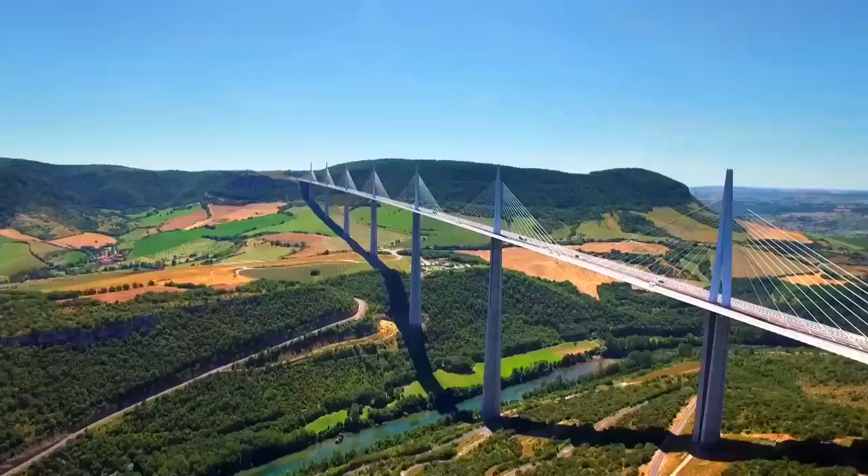Majestic, dramatic, awe-inspiring. These are the bridges that are worldwide icons, as well as engineering marvels. Each of them broke new ground — the first, the biggest, the longest, and the tallest.

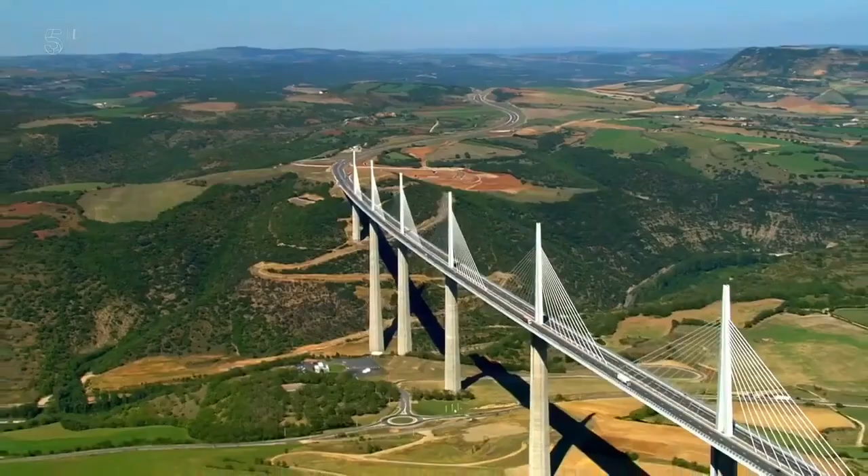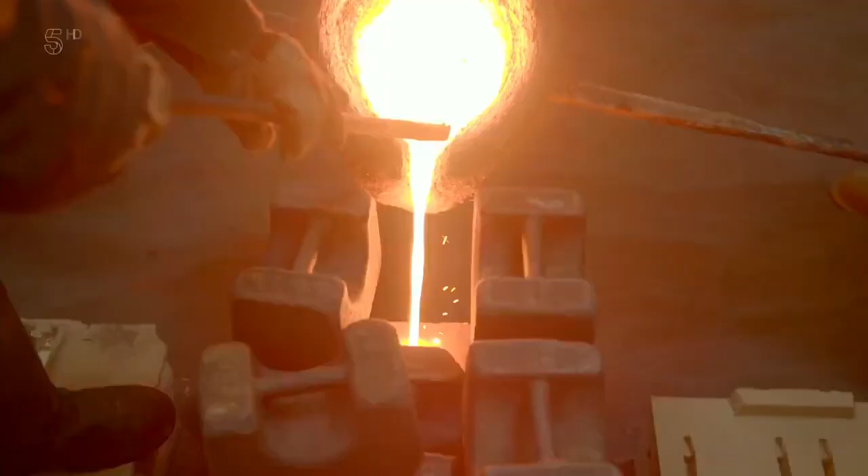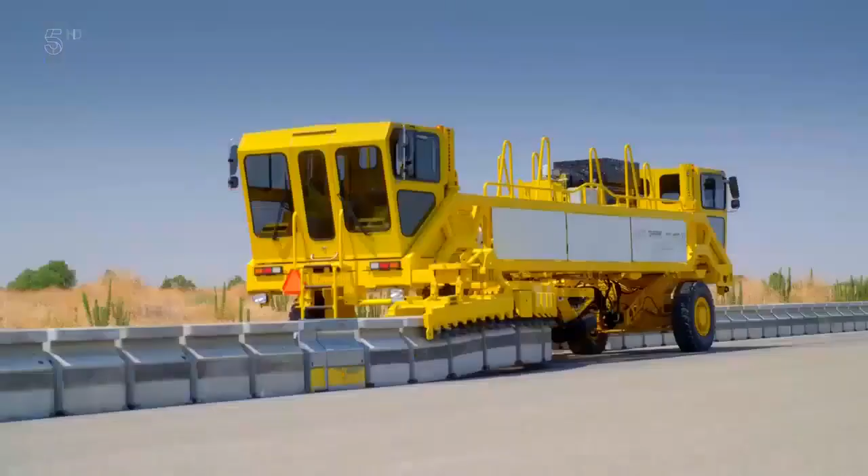I'm Rob Bell, an engineer, and I'm on a global adventure to discover how and why these magnificent structures were built, and to learn about the sweat and the sacrifice that went into their construction. I'm going to take you closer than ever before, inspect them from every conceivable angle, and meet the men and women who keep them working round the clock, no matter what. These are the world's greatest bridges.

New York. 8.5 million people work day and night to make this place richer, brasher, and according to some, greater than any city on Earth.

New York has so many world-famous landmarks, but the one I'm here to see for my money has done more than all the others to transform the fortunes of this city. And it's not the Empire State Building. It's not the Statue of Liberty. It's down there. It's the Brooklyn Bridge.

Rising 276 feet above the water, it stretches 5,989 feet from end to end. 4 massive cables hold up a suspended central span of 1,595 feet and 6 inches. When the bridge opened in 1883, it was the longest suspension bridge in the world. In fact, there's a strong argument that it's the Brooklyn Bridge that made New York, New York.

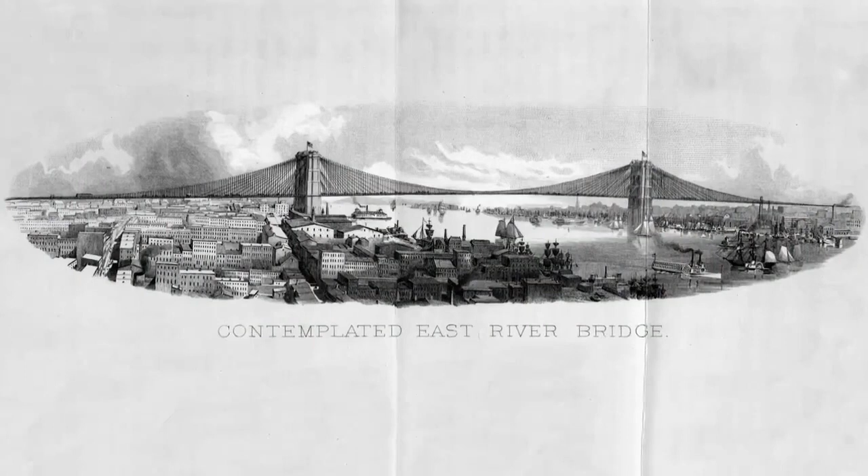In 1857, a new solution was proposed — a suspension bridge, connecting the 2 cities of Brooklyn and New York. The idea was radical, but not exactly new.

The idea of suspending a bridge using ropes or wires over some kind of chasm is an ancient one. And the first ones would have probably looked something very similar to this — a simple catwalk stretched out between the 2 sides of a big drop. It's all very simple, really, and the design principles are clear to see. Now, the part of the bridge that I'm standing on here is called the deck.

The deck hangs from these smaller ropes here called the suspenders. Each of these takes a small fraction of the weight of the deck and the weight of me standing on the deck, up and into these larger cables here, which run the full length of the bridge — these are called the main cables. And at each end of the bridge, the main cables are attached or anchored to solid ground, or in this case, a solid tree.

The beauty of this design is that it doesn't really matter how big the gap is from one side to the other. If you want to make the bridge longer, you just add more cable, which means it's perfect for crossing a large stretch of water. In theory, there's no limit to its length.

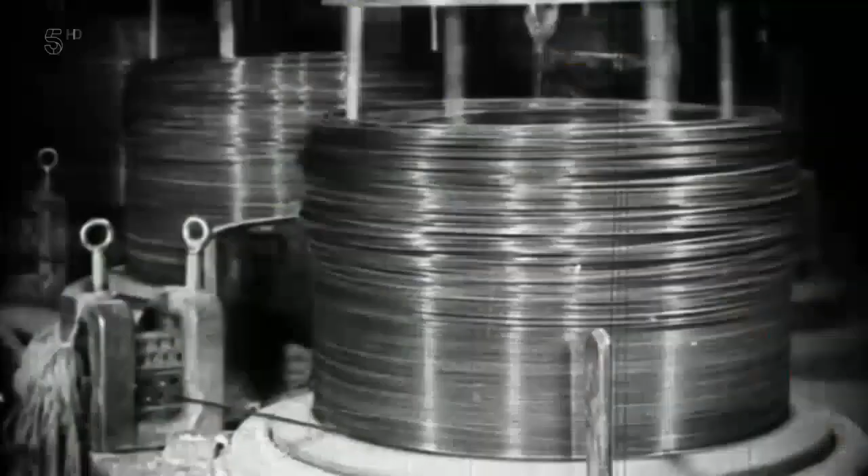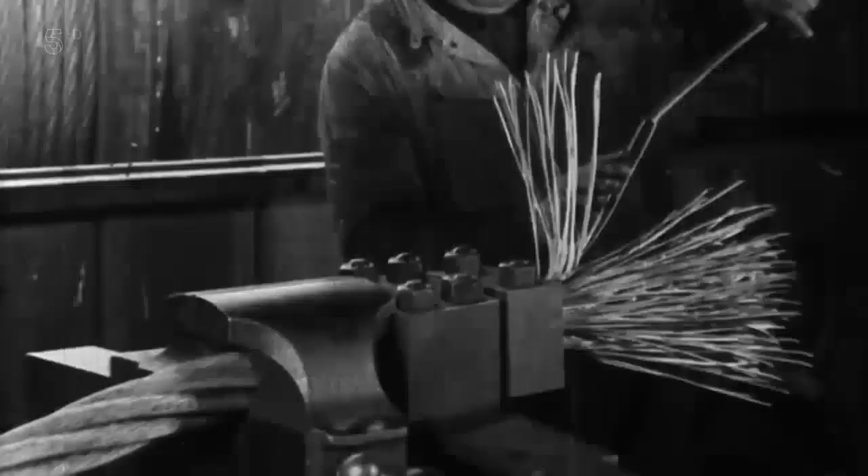In the early 1840s, Roebling read about a new wire rope from Germany and decided to start making his own. Stronger, lighter and longer lasting than its natural equivalents, Roebling's rope was a massive hit. Pretty much any industry that needed to pull or hang things was soon doing it with wire rope. The most innovative user of wire rope was Roebling himself. He took this rather mundane product and used it for something quite extraordinary.

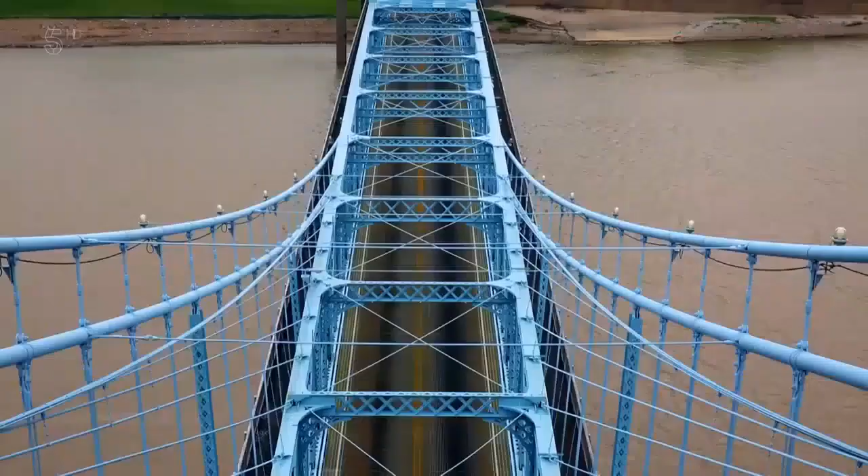This is the John A. Roebling Suspension Bridge, opened in 1866. The main span stretches 1,057 feet across the Ohio River between the cities of Cincinnati and Covington. At the time, it was hailed as a truly groundbreaking structure.

But Roebling was just getting started. He was convinced that he could use his rope to build bridges at a scale the world had never seen. And he knew just the stretch of water to prove it: the East River between Brooklyn and Manhattan. But he also knew he needed political approval. And that meant dealing with this man, the boss, possibly the most corrupt politician in American history.

The Brooklyn Bridge, a structure that changed engineering forever. When it opened in 1883, it wasn't just the longest suspension bridge on Earth, but the most revolutionary. It shattered accepted notions about how long bridges could stretch, what they should look like, and even how they're built.

Brooklynites supported the idea from the off. They were fed up of the old ferries and wanted the bridge as soon as possible. In 1867, leaders here at Brooklyn City Hall agreed to buy $3 million worth of stock in the newly formed New York Bridge Company.

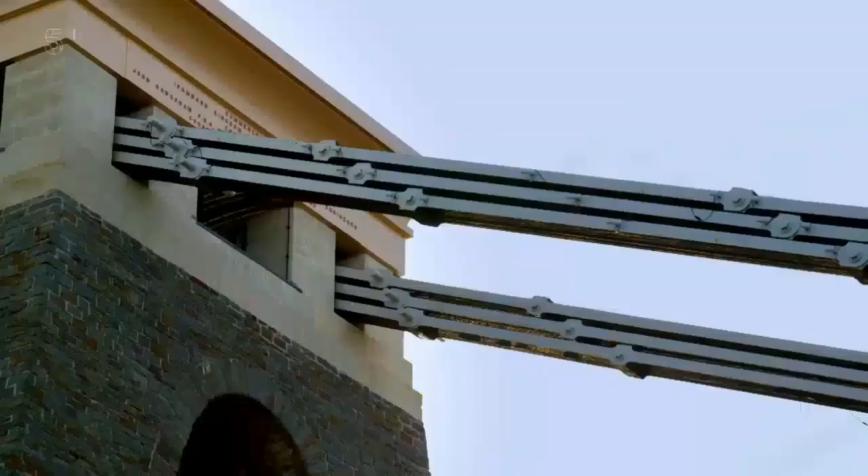Roebling's Cincinnati Bridge had proved that his wire cable was the perfect material for making long suspension bridges. Prior to that, suspension bridges used chains made from metal links.

Now, a chain bridge has one potentially fatal flaw. To paraphrase a well-known term, a chain bridge is only as strong as its weakest link. Let me show you. If I take my bike chain tool here and I remove one pin, it only takes one link on a chain suspension bridge to fail, and the whole thing comes crashing down.

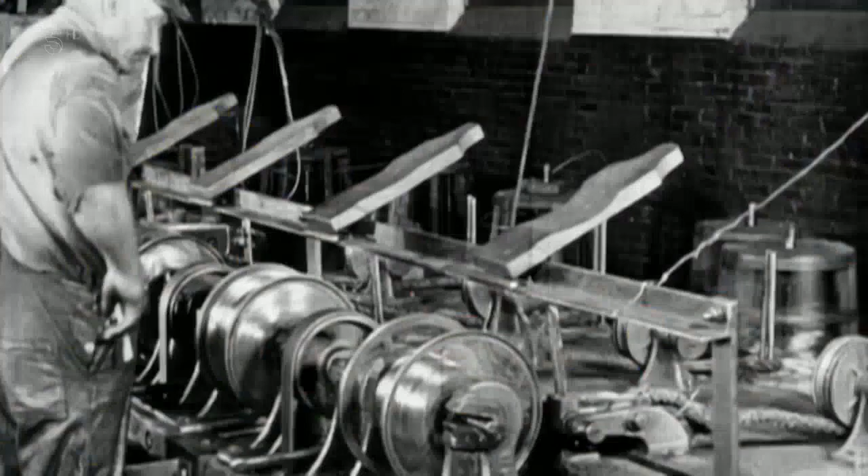But that's not the case with wire rope or cable. This is made by twisting multiple steel threads together to form thin strands. These can then be twisted to form thicker ones. The whole process can be repeated until these cables reach the desired width and strength. Not only can they carry massive loads, but if one, two, or even several threads fail, there are still hundreds of other strands keeping the wire in one piece.

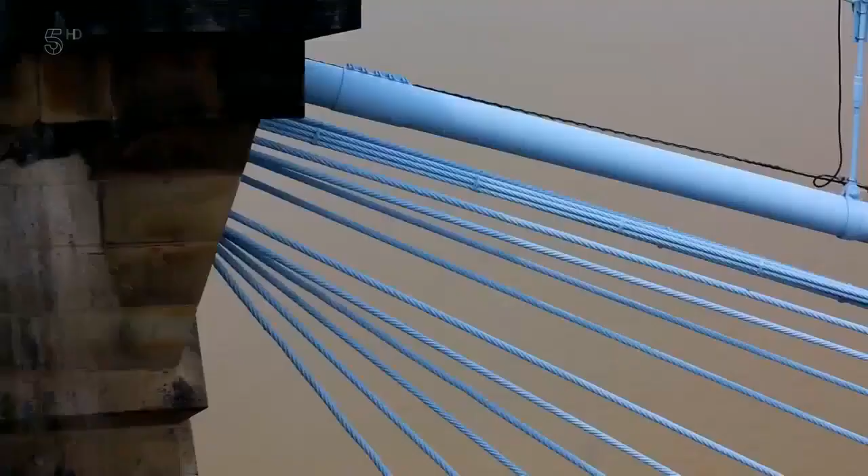This is what Roebling had demonstrated to such great effect with his Cincinnati Bridge. But although strong and impressive, it was nothing compared to his plans for the Brooklyn Bridge.

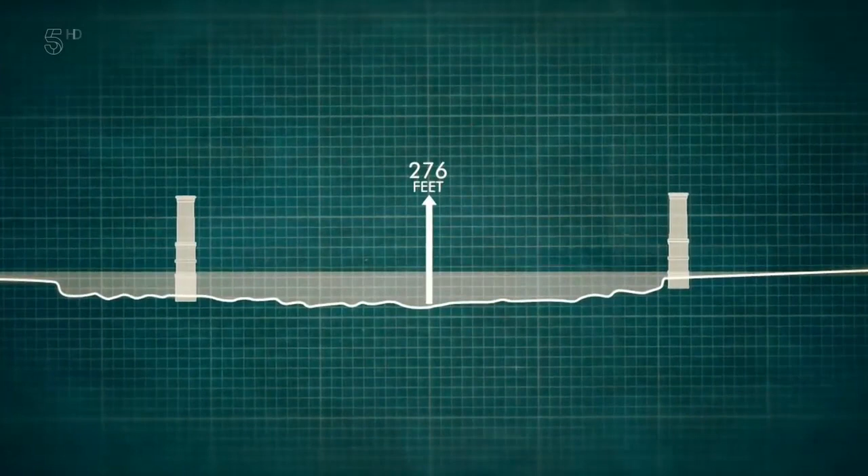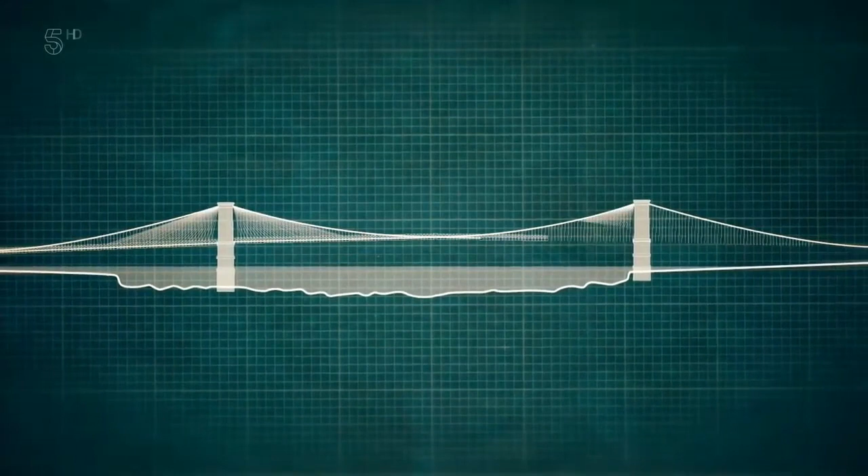Two gigantic towers would rise 276 feet above the water, supporting four giant 15 3/4-inch cables. Suspenders secured to the cables would support a 5,989-foot deck. Sitting on the bridge would be 5 independent carriageways, 2 for horse and carts, 2 for trains, and 1 for pedestrians. When completed, it would be the longest suspension bridge in the world.

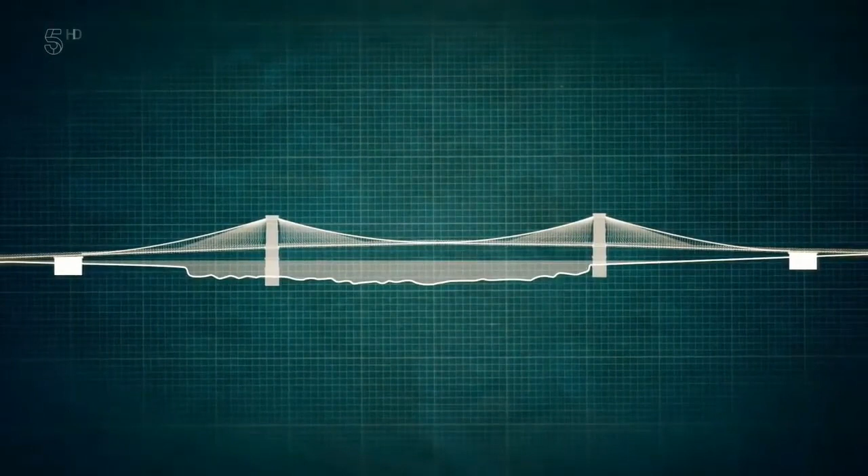It would incorporate all the safety features that Roebling had successfully employed here in Cincinnati. He'd have the same 4 main suspension cables, but this time making them even thicker, 16 inches in diameter. And he planned to stiffen the roadway, similarly to here, by encasing it within this steel truss, a kind of rigid box that's both light and strong. When someone asked him how long he expected his bridge to last, he simply replied, Forever.

Roebling spent 2 years checking and double-checking every detail personally. Finally, they were ready to start constructing the record-breaking bridge. But then, in 1869, tragedy.

On the 28th of June that year, John Roebling was standing right about here on the Fulton ferry landing. He was carrying out one last check on the centerline for his new bridge when his leg got caught in a piece of rotten decking. As he tried to pull it free, a ferry crashed into the pier, crushing the chief engineer's foot.

His injuries were severe. His doctors had no choice but to amputate his toes. But much worse was to follow. The wound became infected, and within days he became gravely ill. On the 22nd of July, 1869, John Augustus Roebling died.

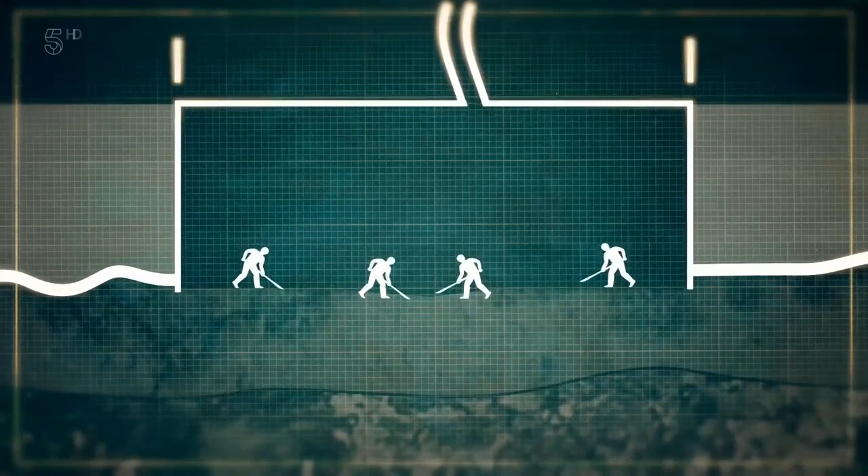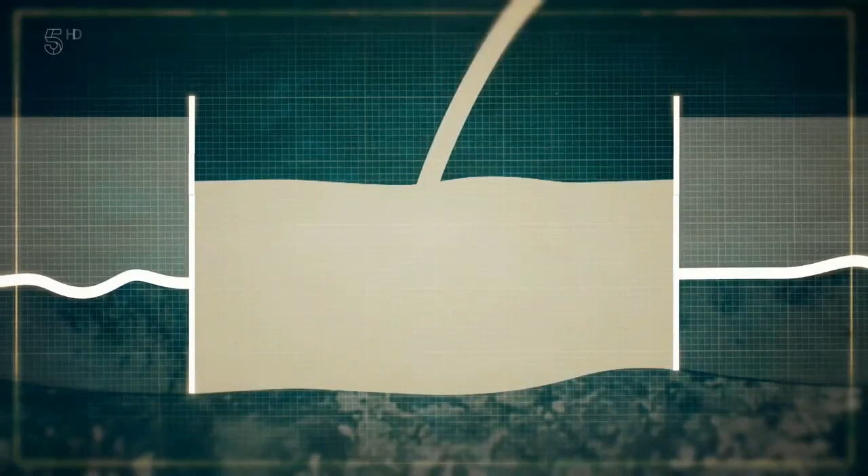A caisson is basically just a big upside-down box that's sunk to the bottom of the riverbed. Compressed air is pumped in, creating an air pocket. Inside the caisson, workers can dig away at the riverbed, sinking the caisson lower and lower, whilst on the surface, another group extends the top of the tower to keep it above the waterline. Eventually, the caisson will come to rest on bedrock, at which point it's filled with concrete and rubble, creating a permanent foundation.

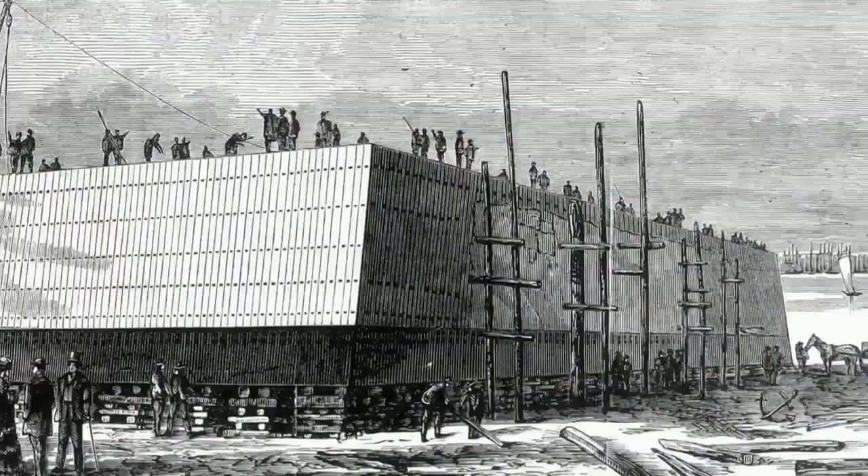The New York caisson was floated out to this point here in 1871, and the Brooklyn caisson over there a year earlier. Now, each was 14 feet high, and at a length of 168 feet by 102 feet wide, they were bigger than the size of 4 tennis courts combined. In fact, I'm not far off being directly above one of the corners of the New York caisson here now.

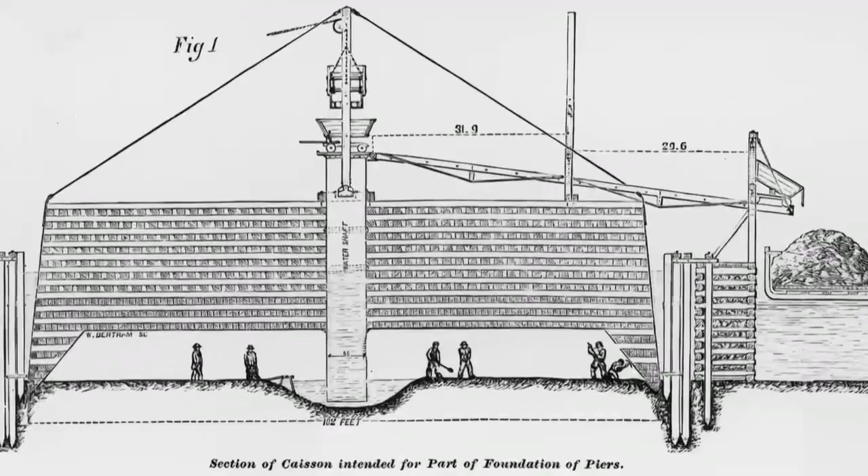Washington Roebling personally designed the caissons, inventing a method of removing the spoils without disturbing the pressurized atmosphere. A central column would run to the bottom of the caisson, into a water sinkhole, which the men would fill with dirt and rocks. Then huge grabbers would descend from the top and remove the rubble.

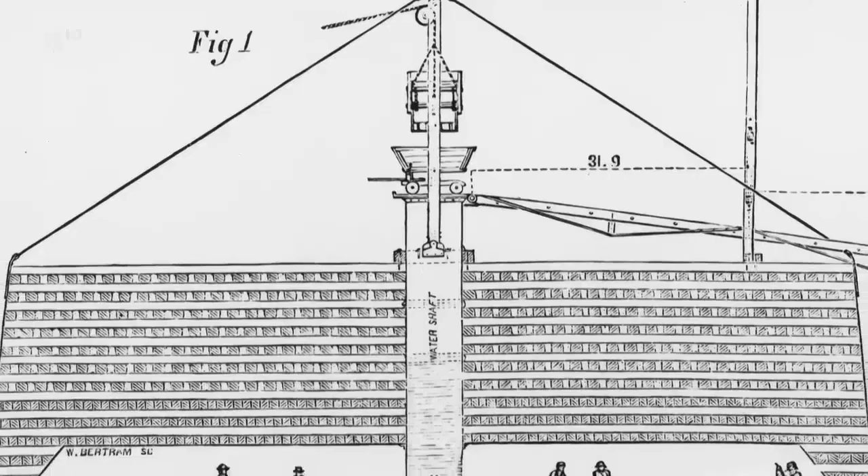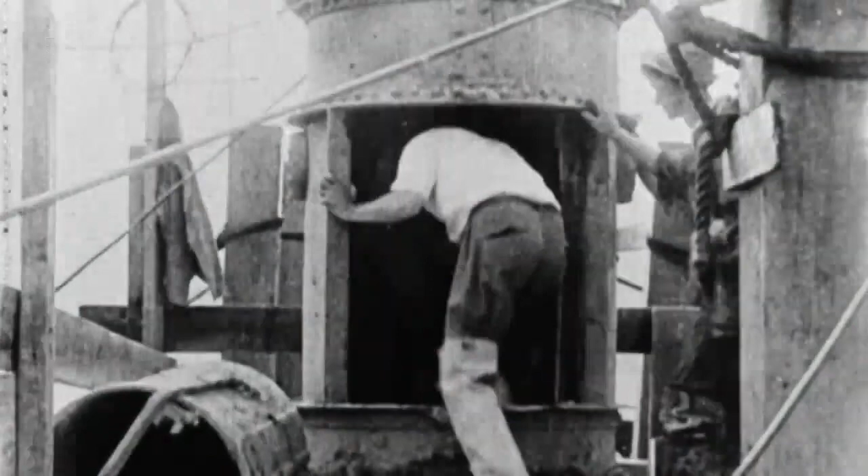Despite these advances, life in the caissons was hellish. The manual labor was backbreaking, and the pressurized atmosphere made it difficult to breathe. The men working in the caissons became known as sandhogs. Most were Irish, Italian, or German immigrants, attracted by the generous pay of $2 per 4-hour shift.

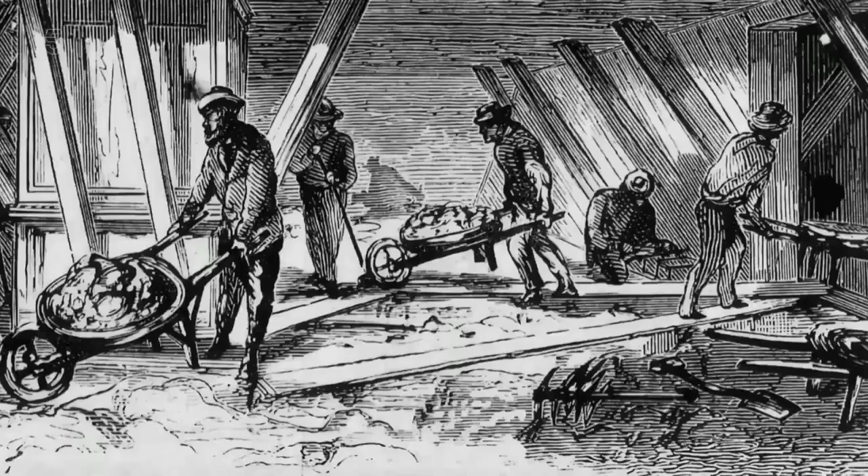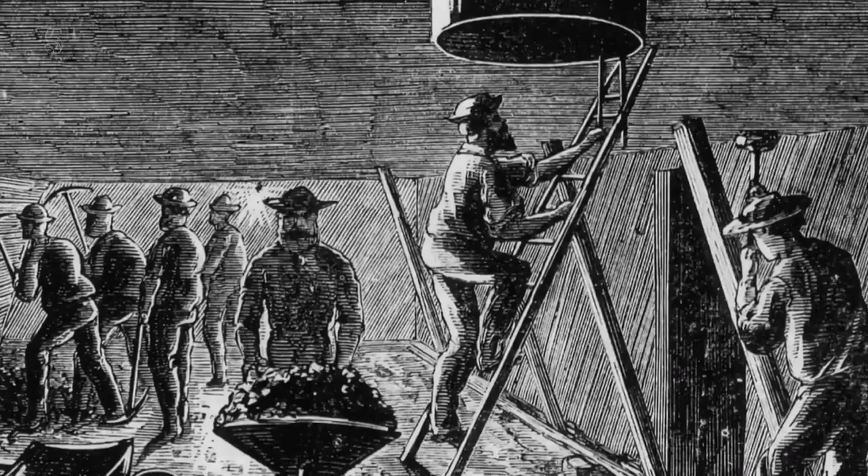But working in the caissons could be a death sentence. Sandhogs would suddenly get gravely ill or become paralyzed. Others would climb to the surface, go home, only later to collapse and die in agonizing pain. These unpredictable bouts of illness and deaths remained a mystery until the bridge company's surgeon, Dr. Andrew Smith, put forward his own theory.

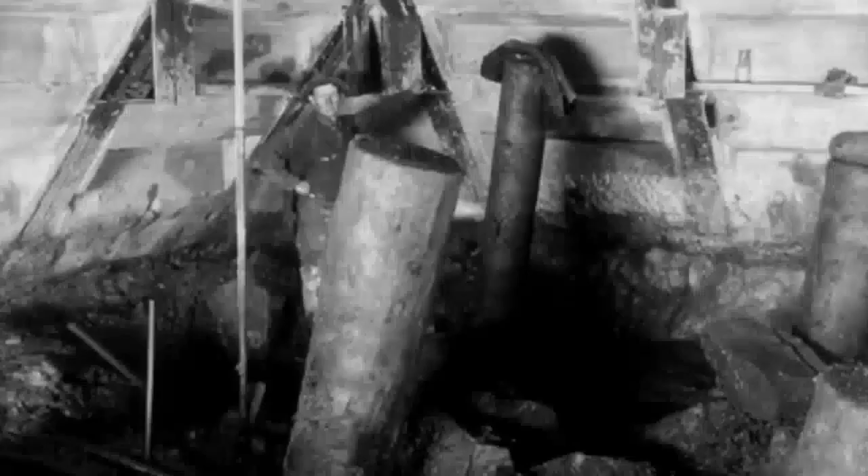Smith observed that the deeper the caisson, the more severe the symptoms, and the longer the sandhog spent inside, the more susceptible they became. He called the condition caisson disease. Sufferers characteristically bent forward at the hips, doubled over in pain. So the sandhogs started calling it the bends.

Nowadays, we call the condition decompression sickness, and we understand exactly why it happens. I've come here to the Diving Diseases Research Centre in Plymouth to experience just a bit of what those sandhogs were going through.

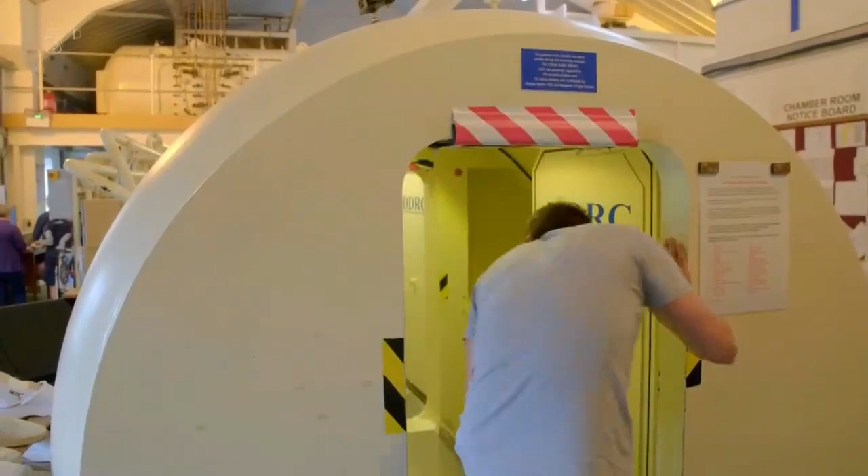This hyperbaric chamber will mimic the conditions of the Manhattan caisson's final depth, 78 feet, by steadily increasing the air pressure. As I descend and the pressure increases, my bloodstream and body tissue start absorbing nitrogen in the form of microscopic bubbles. These bubbles start to compress under the pressure, just like this exercise ball.

There was so much happening as the pressure built up in here. It's effectively like we were descending, getting deeper and deeper. First of all, my voice has gone this very thin, high-pitched, almost like I've been breathing in helium type voice. It's really quite hard to take myself seriously at the moment. I'm just sat here right now, not really doing anything, but it is just a harder existence to be in these high-pressure conditions, these literal high-pressure conditions.

Just imagine what it was like for those sandhogs, for the workers digging away at the bottom of the riverbed there in order to try and find that bedrock to build the foundations on. Absolutely horrendous, back-breaking work. But the real problems for the sandhogs started when they returned to the surface.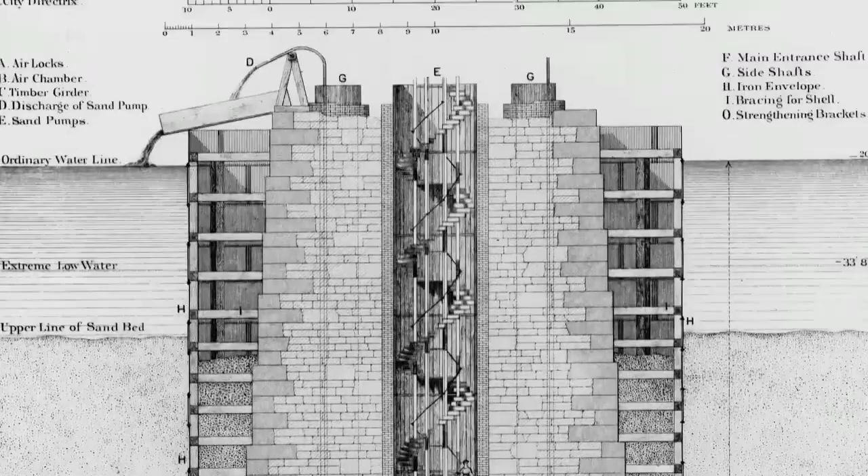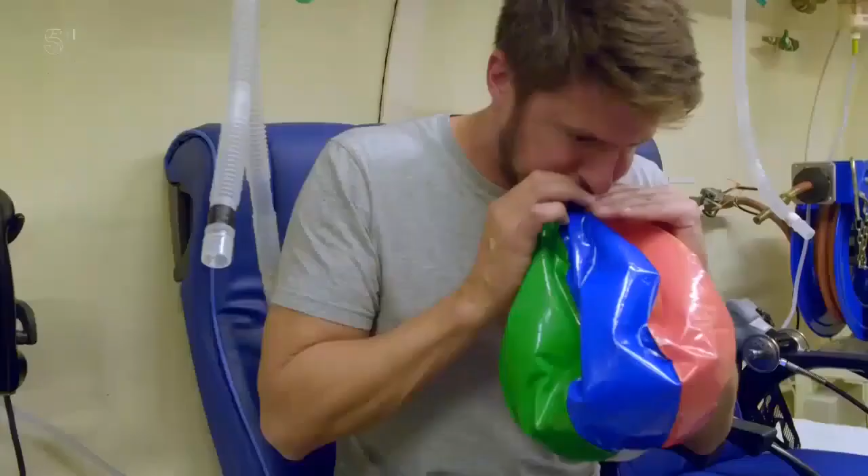The chamber is now going to decrease the pressure to mimic the effect of travelling upwards. Before we do that, though, I'm just going to blow up this ball here. That's actually quite hard doing that in this pressurised conditions. Right, I've got my beach ball fully inflated there. We're going to see what happens to that as we go back up. Keep an eye on my exercise ball down here as well.

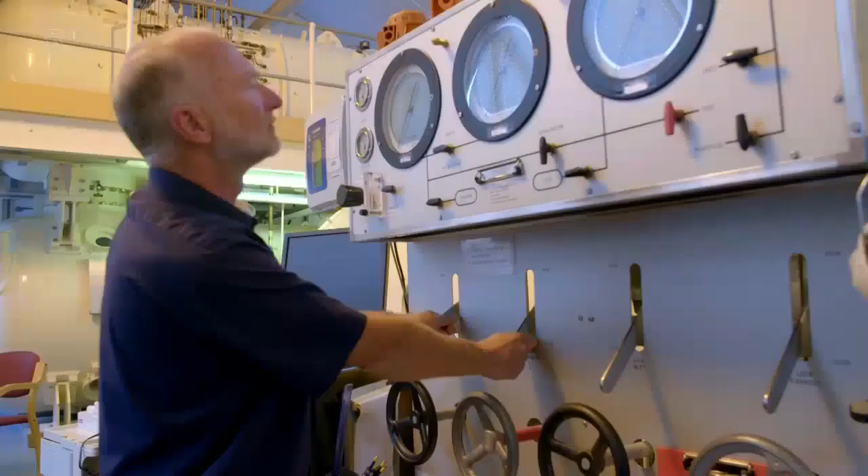What should happen as we go back up, as the pressure in here decreases, is those bubbles that were in my bloodstream here go from small to large. But because we're going to go up nice and slowly, those bubbles will be allowed to expand slowly and be able to get back to their normal size in atmospheric conditions and leave my body without any harm.

The problem with the sandhogs is that they would leave the caisson into the airlock where the pressure would be released in an instant. Then those bubbles would expand far too quickly for their bodies to cope with, bursting arteries and veins, damaging their soft tissues in their body, and could possibly lead to an excruciating death.

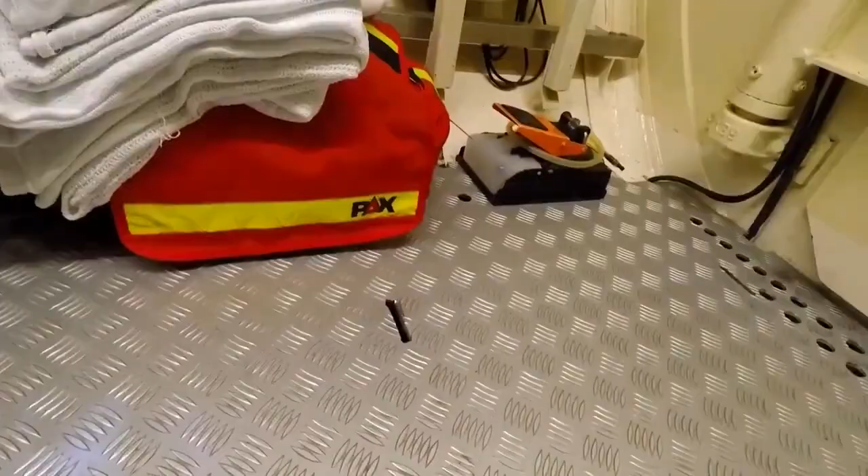At least 20 men died from the bends. What we don't know is how many others suffered and survived, possibly hundreds. But we do know the name of one victim, Washington Roebling.

He had spent months down in the caissons, supervising the building of the towers. But the prolonged effect of working at pressure had a disastrous effect on his body. He became paralyzed. Roebling was taken to his house here on Columbia Heights in Brooklyn. He was unable to leave his bed, and many of his friends and colleagues feared the worst. For the second time in as many years, the chief engineer was at death's door, and the Brooklyn Bridge itself looked dead in the water.

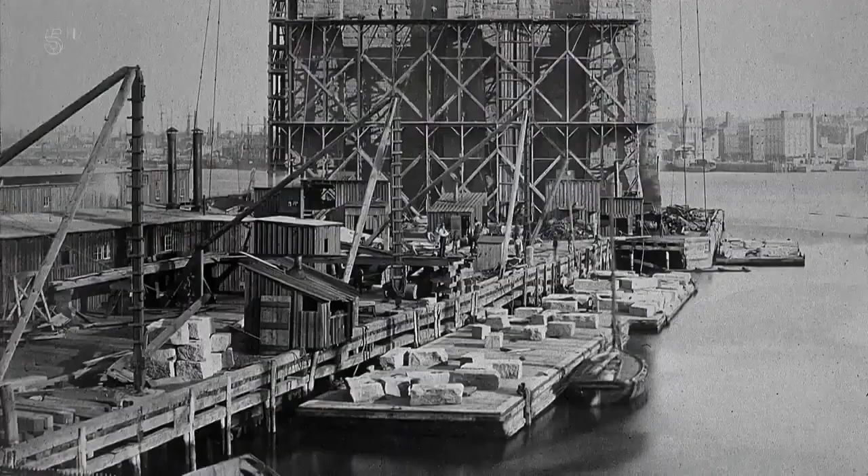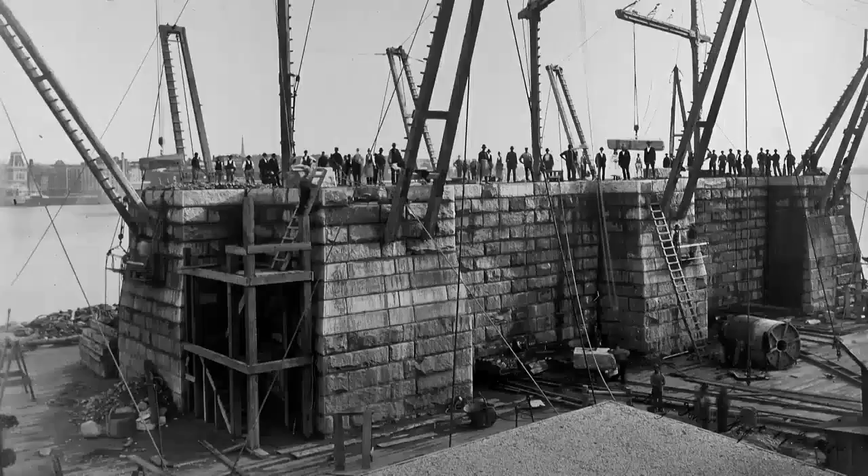By the spring of 1872, the Brooklyn Tower foundations were complete, and the tower itself had risen about 100 feet above the waterline. To the casual observer, it looked as if the New York Tower hadn't risen at all, but in reality it was almost as tall under the water as the Brooklyn Tower was above.

Here at the Brooklyn Tower, the caisson workers, the sandhogs, hit bedrock 44 feet down. But here on the New York side, the bedrock was 106 feet down. And as the caisson descended, the pressure inside climbed ever higher.

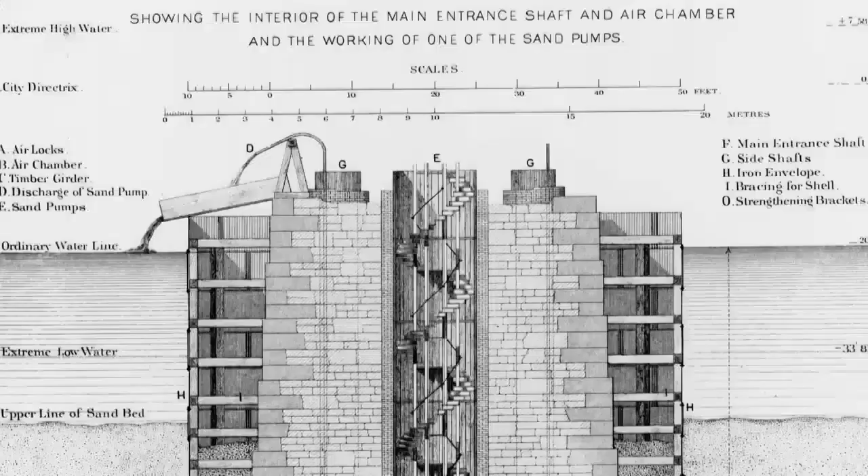Washington and Emily were caught in a terrible dilemma: keep digging and condemn yet more men to death, or stop and risk leaving the New York Tower on shaky ground, literally. On the 18th of May, 1872, when the New York caisson was still 30 feet from the river's bedrock, the Roeblings decided it was far enough.

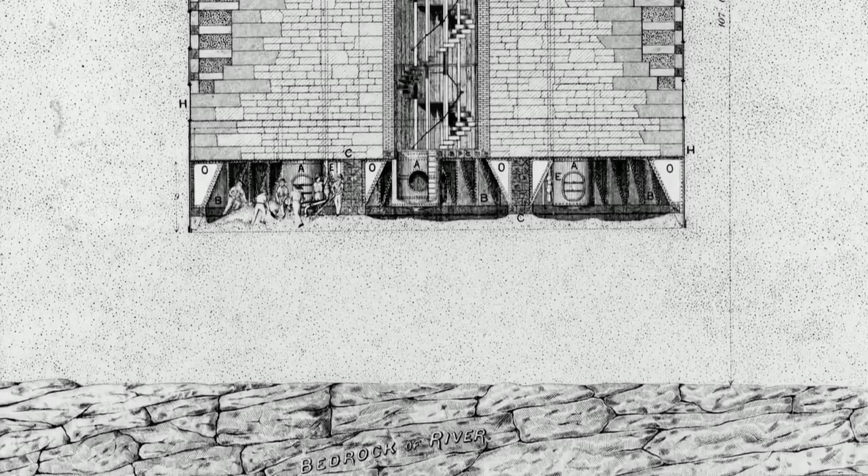Washington had calculated that the compacted sand the caisson was resting on would be sufficiently stable. Roebling had no way of knowing that for sure, but his gamble clearly paid off. The foundation for this tower came to rest at 78.5 feet below high water, and it hasn't moved since.

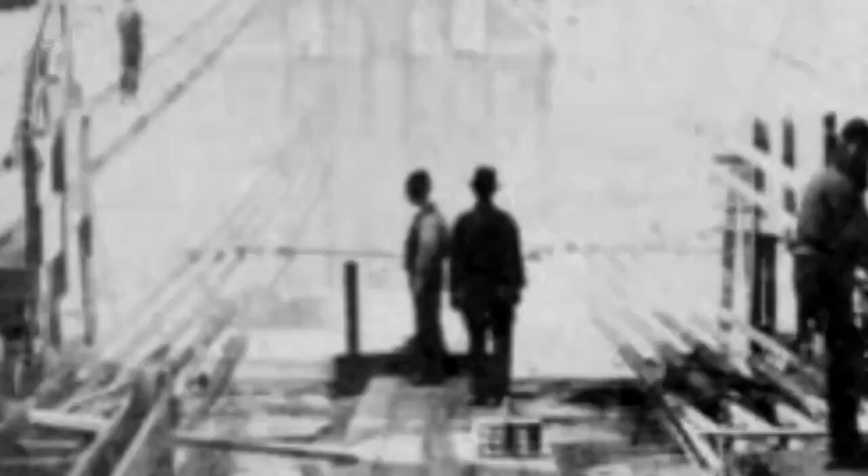With Roebling watching from his bedroom and Emily on the worksite, the two granite towers rose majestically from the water. To commuters struggling across the East River by boat, it seemed like the walls of an ancient Gothic cathedral had emerged from the river.

The New York Tower was completed just in time for the 4th of July, 1876, which happened to be the USA's 100th birthday. And as a battery of fireworks were set off from the two isolated towers, it looked like New York and Brooklyn would finally get their bridge.

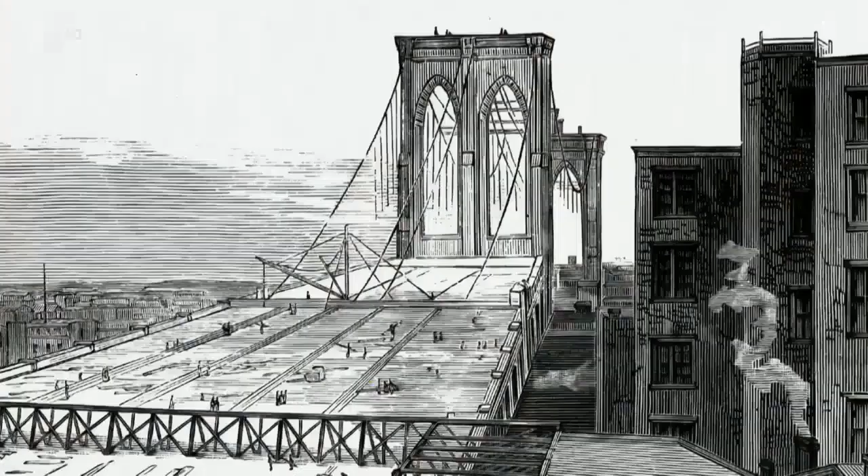With the towers complete, the next phase could begin. In many ways, it was the most magical part of the whole process: erecting the suspension cables. Old John Roebling didn't invent the suspension bridge, nor did he come up with the idea of using cables in them.

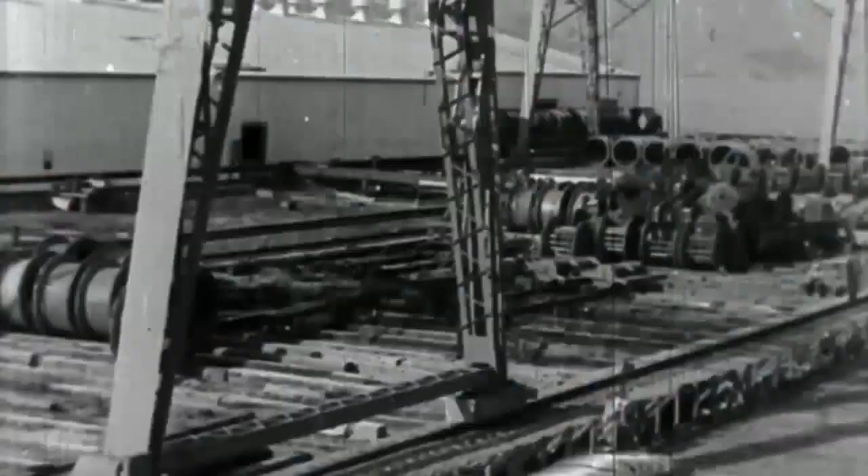But what he did invent was an ingenious method for getting those cables from one side of the bridge all the way across to the other side. He called it spinning. The idea is brilliantly simple.

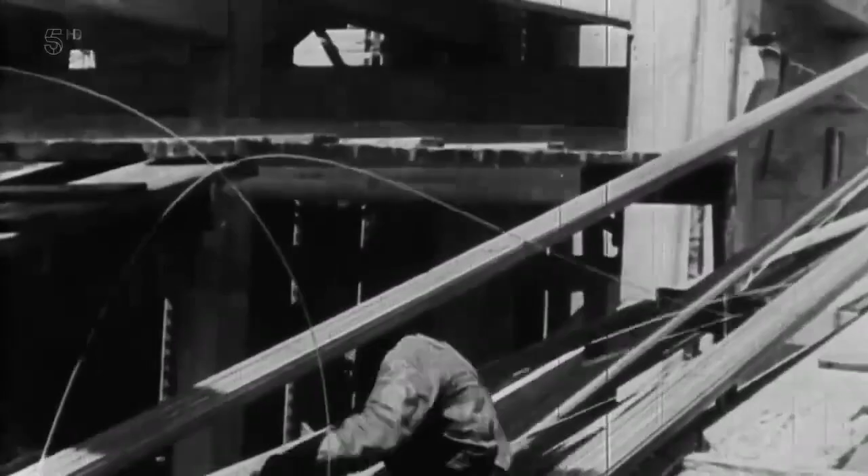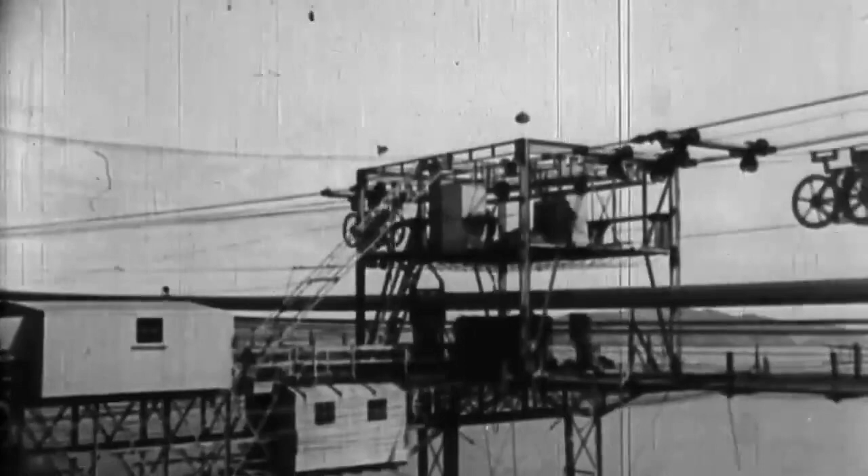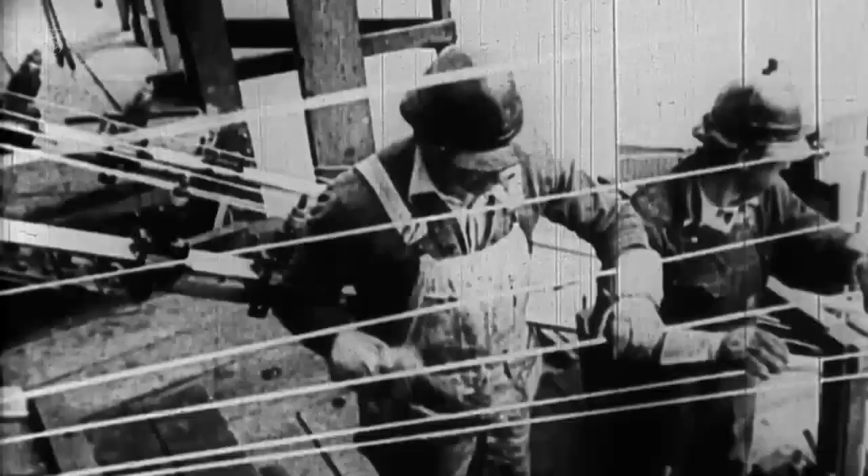A long reel of wire about the thickness of a pencil lead is attached to a massive weight or anchorage, pinning the cable to the ground. A spinning wheel attached to a pulley then unspools the wire, taking it over the top of the first tower, across the main river span, over the second tower, and down the far side where it's hooked to the second anchorage.

This is then looped back and repeated 278 times to form a strand. The process then starts all over again until there are 19 separate strands. Finally, all the strands are themselves bunched together and wrapped in a protective coating to make the main cable.

John Roebling had perfected the art of cable spinning here on his bridge over the Ohio River. And now I've been given special permission to see the ends of these cables where they attach to the ground. I'm heading through that little door into the anchorage.

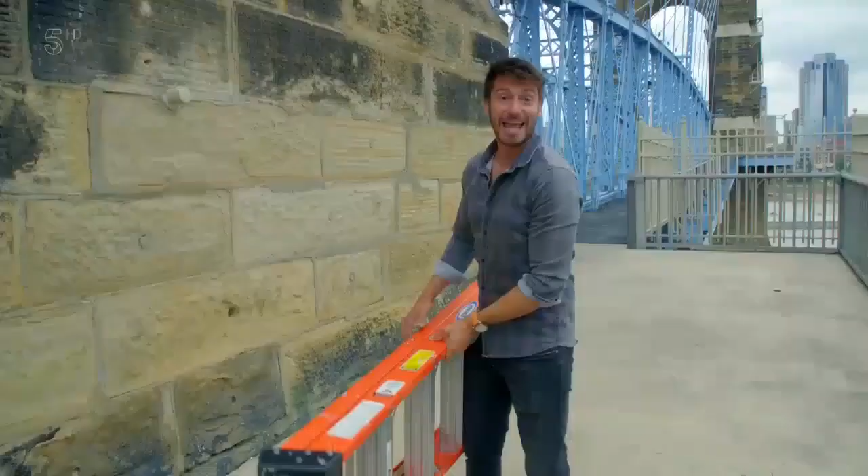Let's have a look. Yeah. Oh, this is brilliant.

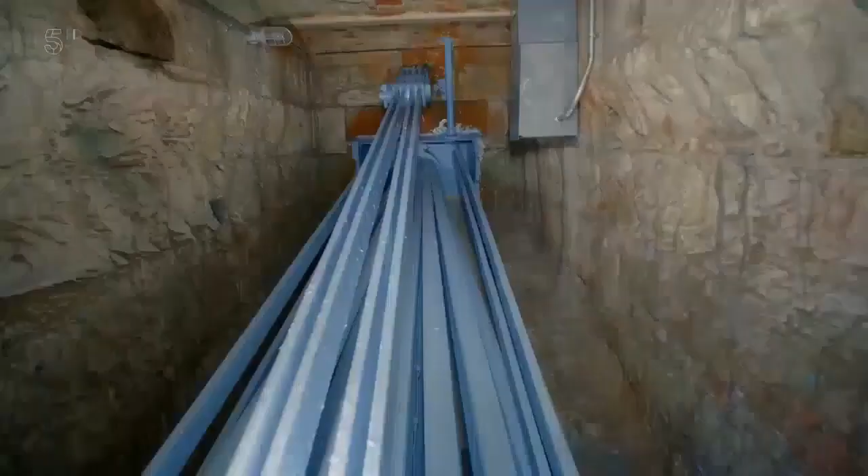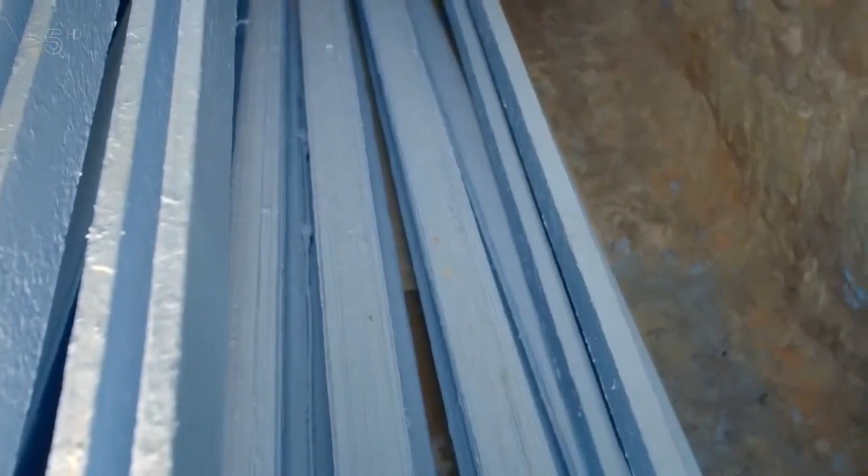This is amazing. Inside this small cabin here, this is the start of one of the anchorages, and you can see at the top here, that is where the main cable comes into the anchorage, and then it splays out into these constituent bundles of wire, and you can still see all the individual wires within the bundle. And then it connects to the anchorage down this end here.

Those bundles of cable come down and they're fixed onto these steel strips with rounded ends here. They're called eyebars because they've got a hole right through the middle. And then what you can't see is that all of that is encased in thick concrete, and it goes as far back as the anchorage. That's what connects the bridge to the ground. The anchorages keep the cables locked in place, but the weight of the bridge is taken by the towers.

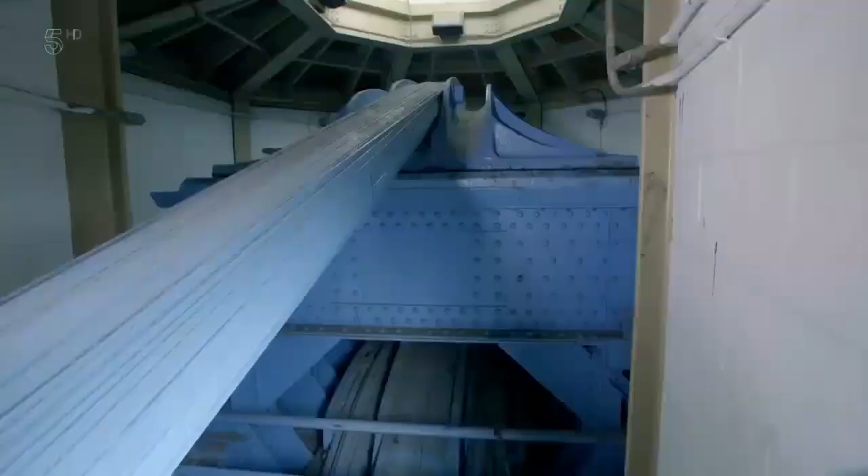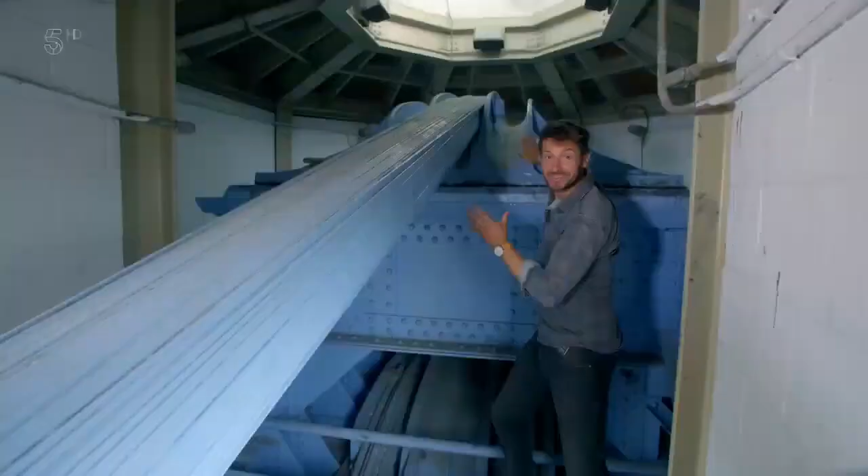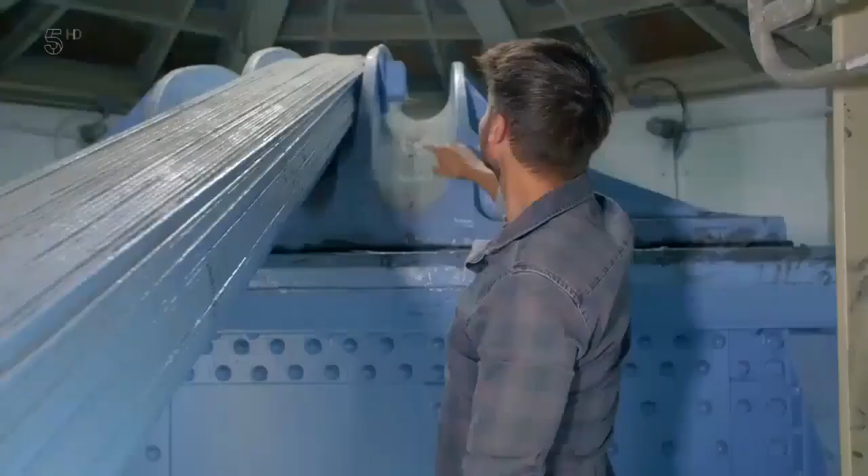Here we go. Now, at the top of each tower here on the Roebling Bridge, the workmen had to carefully guide each strand of wire across the top of this giant plate. This is called the saddle, unsurprisingly. All the weight of the cables themselves, the bridge deck down below, the people and cars going across, any strain caused by the wind, all of that force is transferred from the cables into the towers through the saddle. The saddles are what the whole bridge hangs off of.

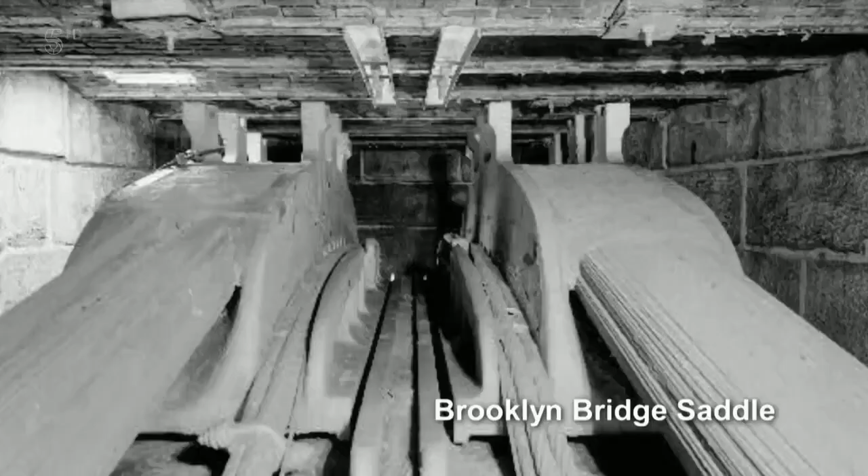It's amazing to get up so close to it all. And of course, it's exactly the same principle as the Brooklyn Bridge, except that was a much larger project. Its 4 main cables would contain 5,434 wires each. If you unspooled just one and stretched the whole length out, it would reach from New York to London, and you'd still have a few miles left over.

In an era when corrupt men like Boss Tweed were all too common, the Roeblings prided themselves on their honesty. Still, Emily surprised everyone when she announced to the board that Roebling & Sons would not be bidding on the contract for the cables. The rationale being that if someone else supplied the wire, the workmen would have no qualms in rejecting it if they found it faulty. But that's where the trouble started.

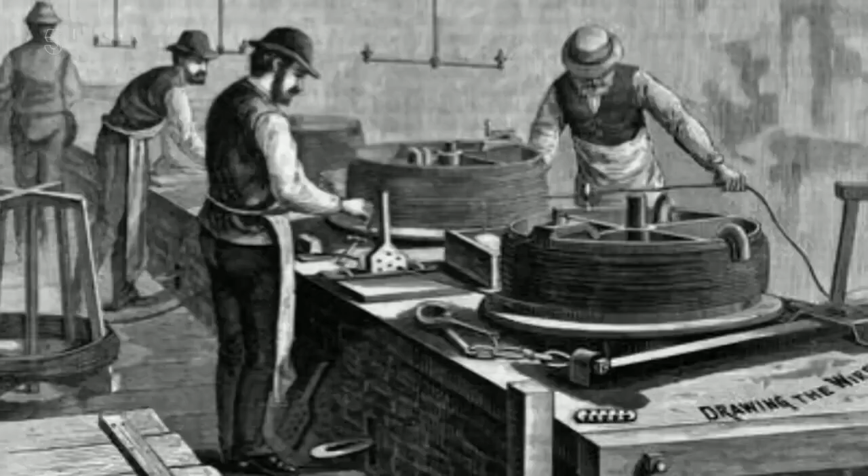The cable contract went to a local businessman, J. Lloyd Haigh. It turned out he was an average manufacturer, but an exceptional crook. His first roll of cable was perfect, meeting the Roeblings' high standards in every way. Unfortunately, that wasn't the wire he sent over to the bridge. Instead, he supplied an inferior wire, too brittle and not nearly strong enough.

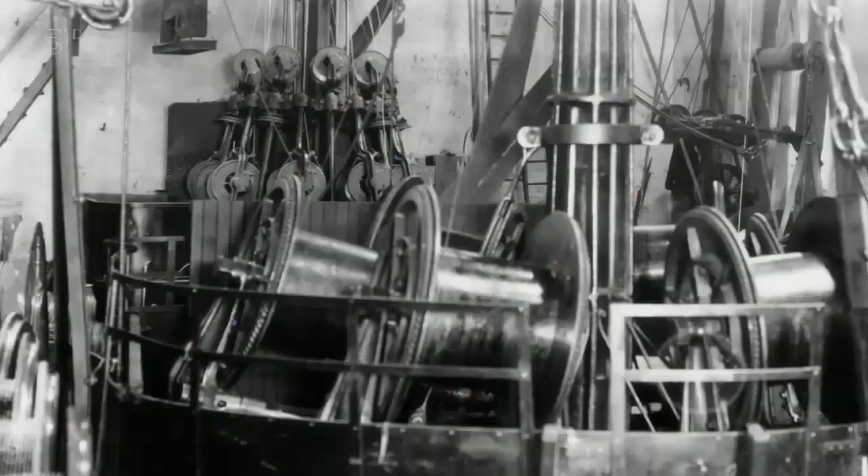It was almost a year before the fraud was detected, but by then it was too late. Miles and miles of bad wire had been spun into the cables. Weeding all of that out and removing it was just an impossible task. In November 1877, a furious Roebling removed the contract from Haigh and started supplying the cables from his own factory. As for the bad wire, it's still in there. The Roeblings had designed their bridge to be so strong it could withstand such a weakness. And J. Lloyd Haigh later went to prison for writing bad checks.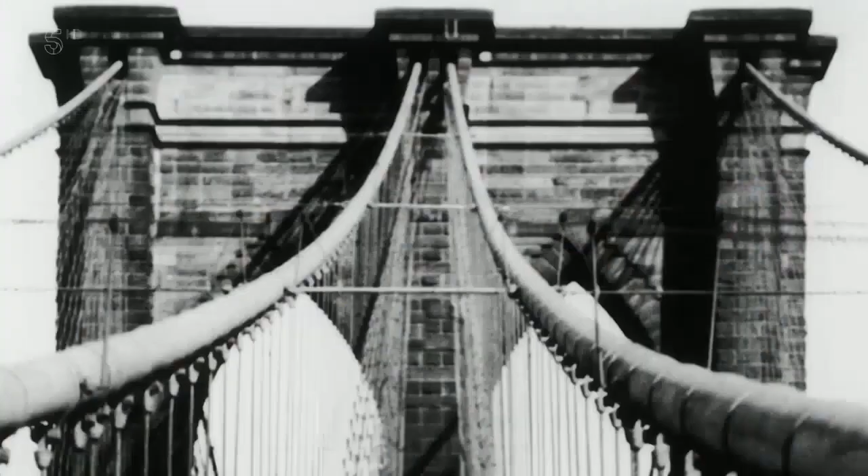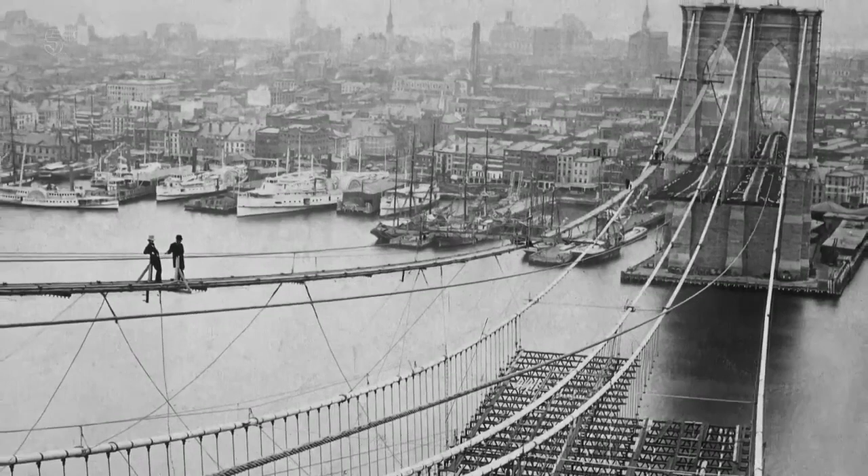On the 5th of October 1878, the last of the great cables was secured in place, and they could finally start constructing the deck. This involved hanging steel suspenders from the giant cables, which in turn would hold 8,000-pound steel floor planks. As these planks started slowly creeping out across the East River, New Yorkers could finally see the bridge taking shape, and the excitement was growing.

By the time 1880 rolled around, the project was 11 years old and continuously dogged by hold-ups. The latest delay concerned the steel needed to make the giant truss around the bridge deck. Part of the problem was the sheer amount of material the bridge needed. Roebling used more than 6,000 tons of steel to make the trusses that gave the bridge its stiffness. But this tendency to over-engineer everything, which had kept the project going after the wire fraud, was now threatening to undo it. The directors were growing impatient, and so was the public. Newspapers joked that one side of the bridge would crumble from old age before the other was even finished. And to make matters worse, Roebling's health was deteriorating. His future and that of his bridge hung in the balance.

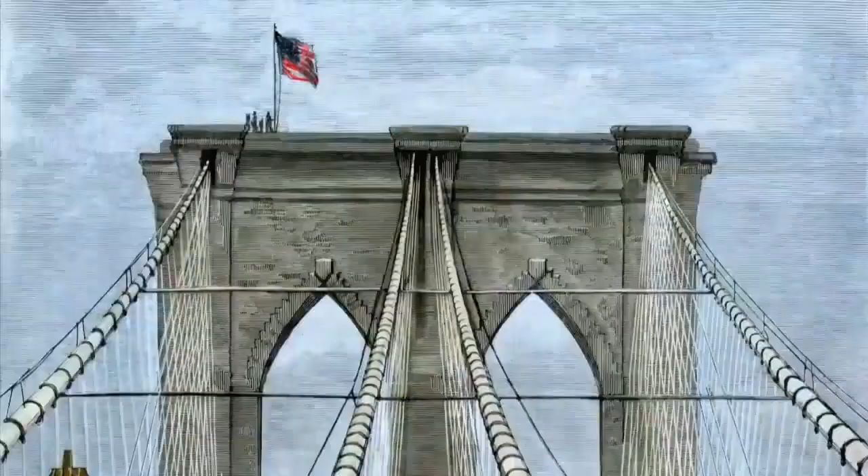Opening day was May the 24th, 1883, and the first living thing to cross the bridge that day was a chicken, carried by Emily Roebling as a symbol of victory. The record-breaking bridge was opened with a record-breaking party. The President of the United States himself, Chester Arthur, led the procession. By one estimate, more than 100,000 people crossed the bridge that day.

But there were two notable absences. One was Washington Roebling, who, fearing the crowds and excitement would overwhelm him, opted to watch from his bedroom window. The other was William Boss Tweed, the corrupt politician who demanded huge bribes in order for the bridge to be built. His dirty dealings had finally caught up with him, and in 1878, he died in jail, a broken man.

Many years later, when Neil Armstrong walked on the moon, a local newspaper interviewed an old woman about all the excitement. It's very interesting, she said, but it's nothing compared to the day they opened the Brooklyn Bridge.

When the bridge first opened, a train ran through the middle. Pedestrians could pay a cent to use the walkway, and horse and cart drivers could use the outer lanes for 10 cents. All these tolls were rescinded by 1911, when the New York mayor, William J. Gaynor, declared, 'I see no more reason for toll gates on the bridges than for toll gates on Fifth Avenue or Broadway.' It quickly became one of the city's main tourist attractions.

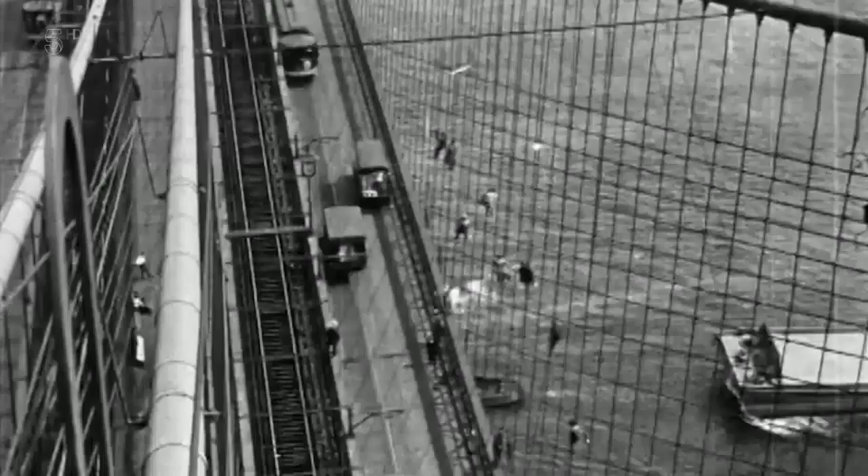But one thing about the bridge has remained constant, that's the challenge it's presented to other bridge designers. How far can you go? New York itself has responded to that challenge several times. First, with the Williamsburg Bridge, off in the distance behind me, which set a new world record for length. That was later beaten by the George Washington Bridge across New York's other great river, the Hudson. Today, this city boasts 58 major bridges, and 4 of those have been world record holders.

But ask any New Yorker which is their favourite bridge, you'll probably get the same answer. Gotta be Brooklyn Bridge. The Brooklyn Bridge.

It just feels like a living part of the city. I like the architecture and how beautiful it looks. At night it lights up and it just makes everything look pretty about this area. It's one of the safest bridges that we have. Roads have cops going back and forth. It's just beautiful.